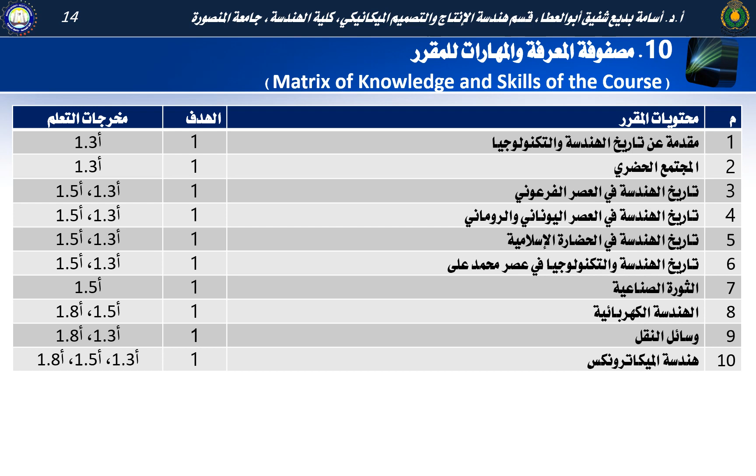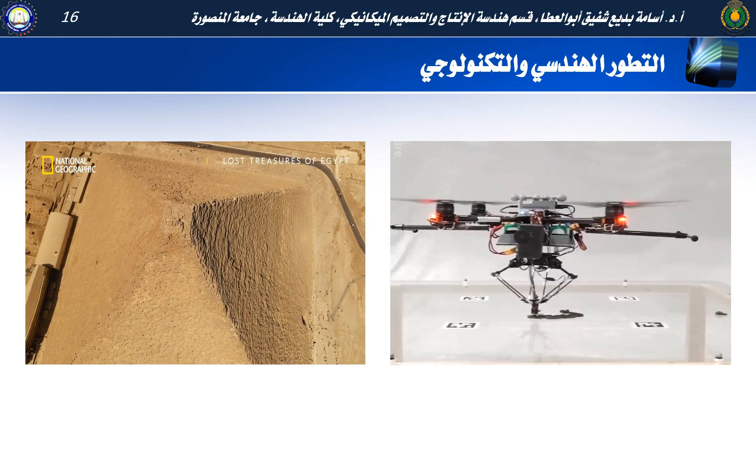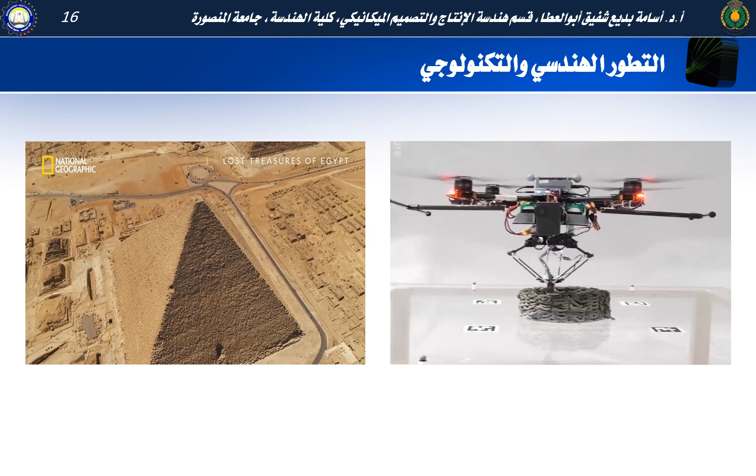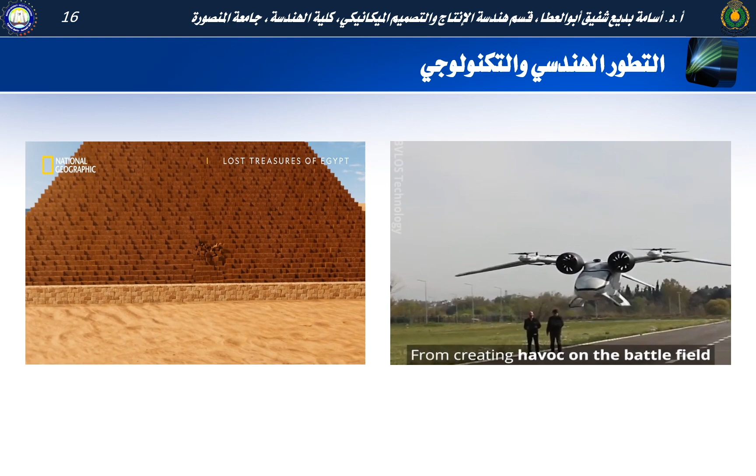The Great Pyramid of Khufu here at Giza is the culmination of hundreds of years of trial and error in pyramid building. But it's not only the perfect shape, it's the largest ever built, and it's never surpassed. The Great Pyramid was a fortress designed to protect the pharaoh's tomb. 24 foot off center, the entrance would have been tricky to find.

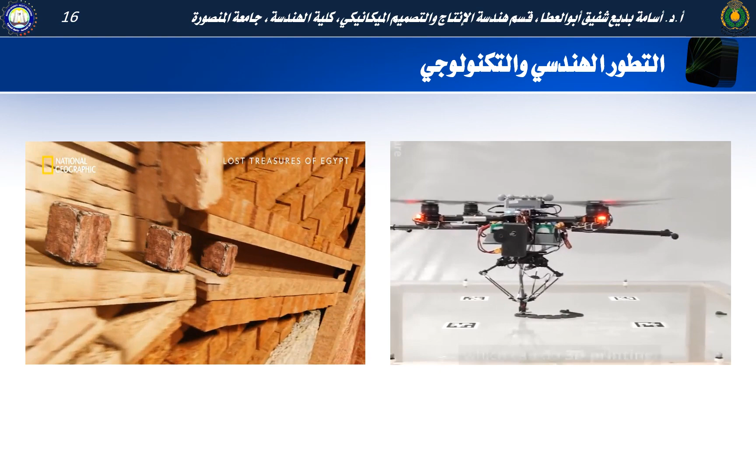At the top of a 130-foot passage, a pulley system of ropes dropped 3 enormous granite slabs, sealing off the entrance to the burial chamber. Next, 3 giant blocks slid down the shaft, closing off a grand staircase. This pyramid was a masterpiece of engineering. Capped with a layer of flawless white limestone, it was an unmistakable symbol of the pharaoh's supreme authority.

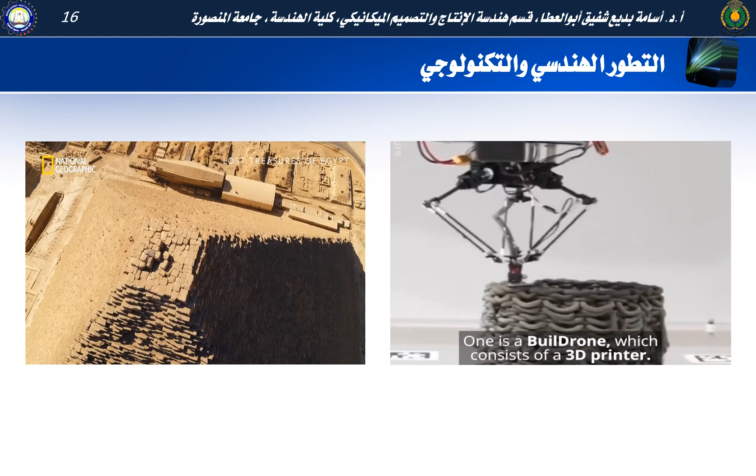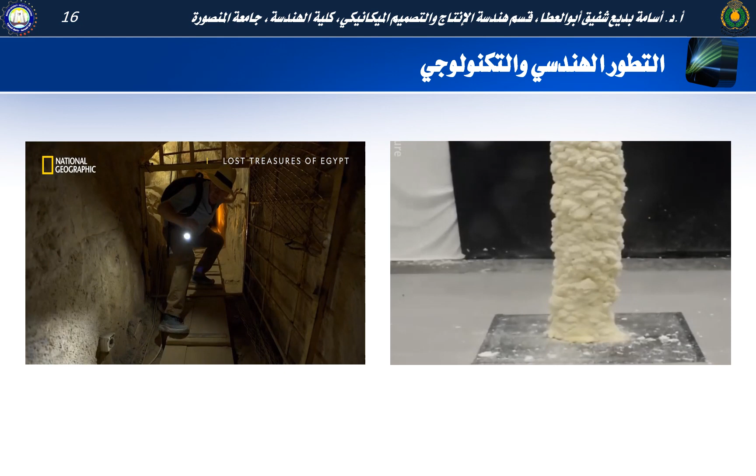The Great Pyramid was one of the first true pyramids ever built, and none of the Pyramid Age kings that followed Khufu would match it. The incredible scale of his tomb suggests Khufu wielded remarkable power, but very little is known about the king himself. Steve has been granted special access to explore the restricted areas inside the pyramid, to hunt for any clues to the life and death of this mysterious pharaoh.

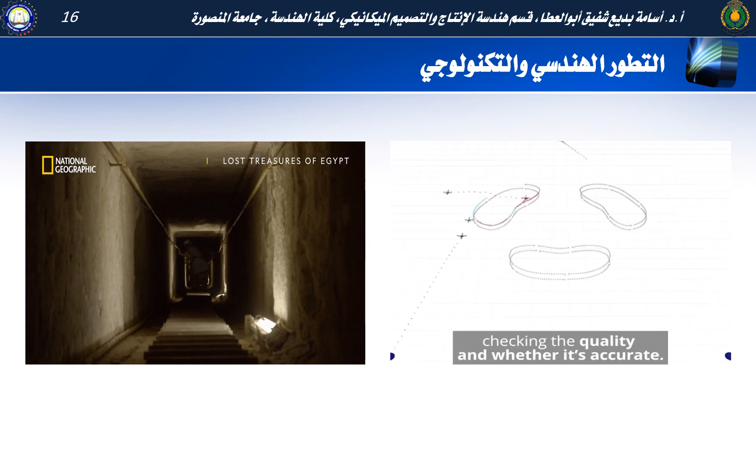I'm going to have to stop for a minute, guys. It really is getting dark. Hard to see anything.

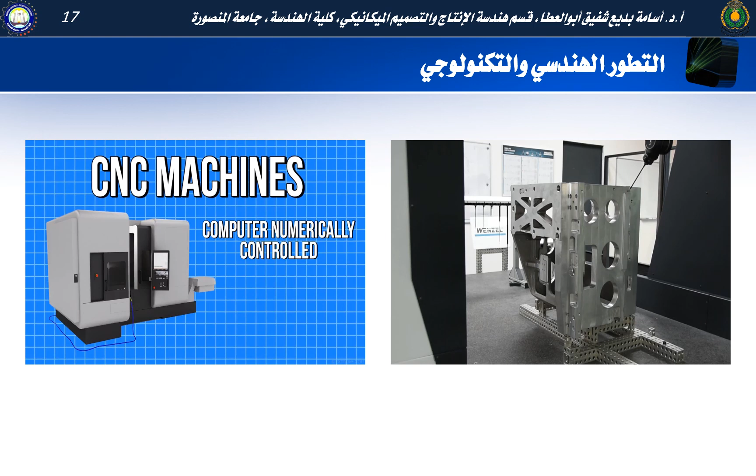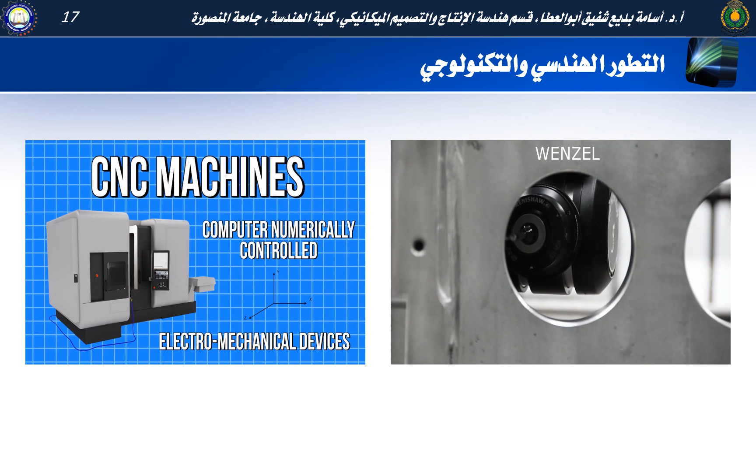With the other being 3D printing.

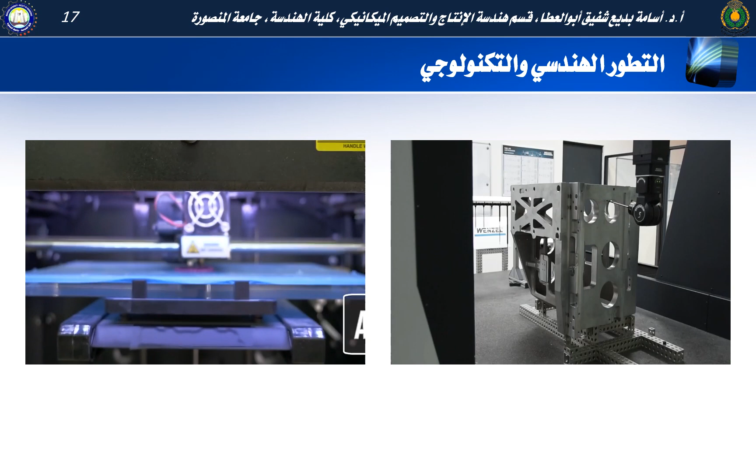On the other hand, is an additive process.

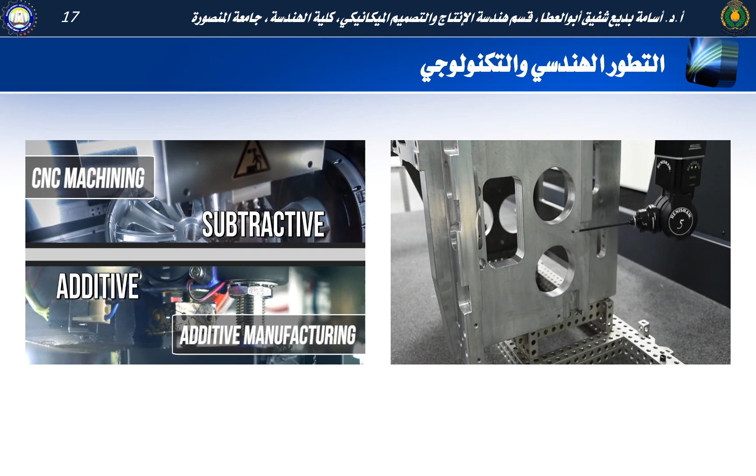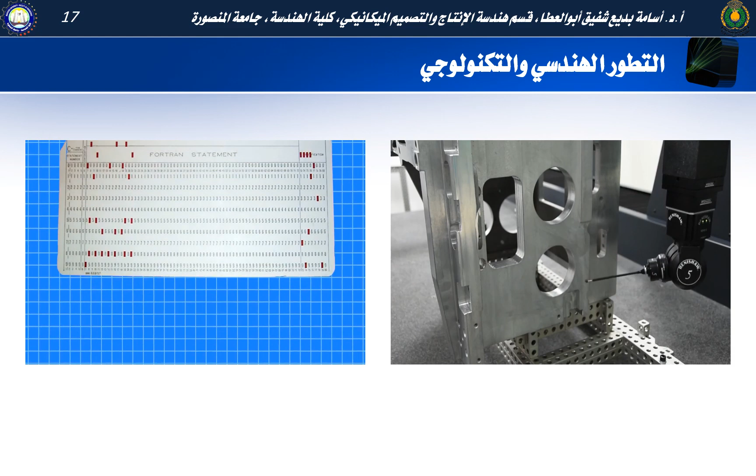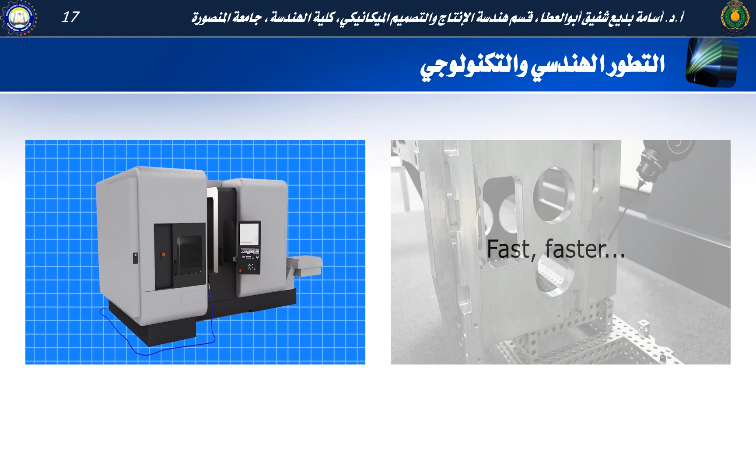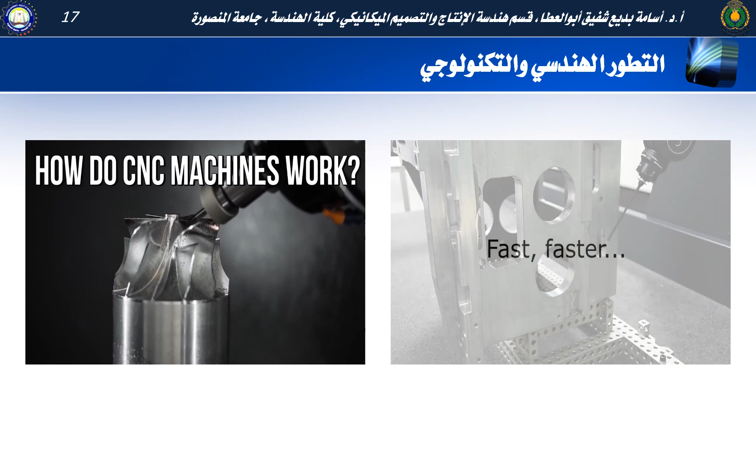Into a punch card and fed into a system that would then interpret the data. Needless to say, these early machines were rudimentary and their functionality was limited. CNC machining technologies rapidly grew as technological capability only accelerated in the late 20th century, which brings us to how modern CNC machines work. As mentioned before, machining is a way to transform a stock piece of material such as aluminum, steel, or titanium into a finished product or part.

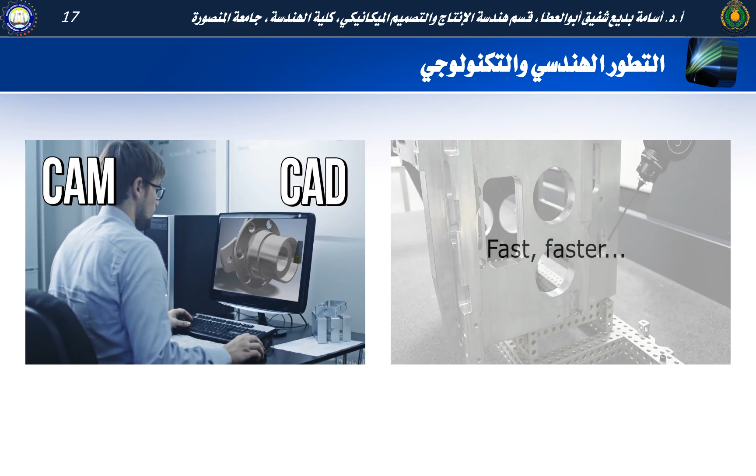CNC machines rely on digital instructions, specifically referred to as G-code. Before modern computer-aided manufacturing and computer-aided design programs such as Autodesk's Fusion 360 were around, machinists would manually write the G-code to control these machines. CAM programs today allow you to take a 3D model and automatically generate G-code that will drive the machine with little input.

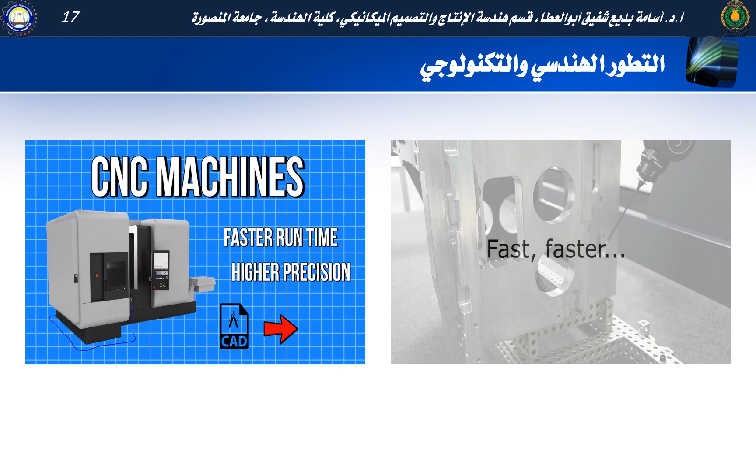When you compare the capabilities of automated CNC machining to the manual alternative like lathes and other machining techniques, you can start to see the benefits. CNC machines simply run faster at higher precision and accuracy while simultaneously allowing the transformation of a digital design into a physical part. CNC machines are precise and are measured in thousandths of an inch.

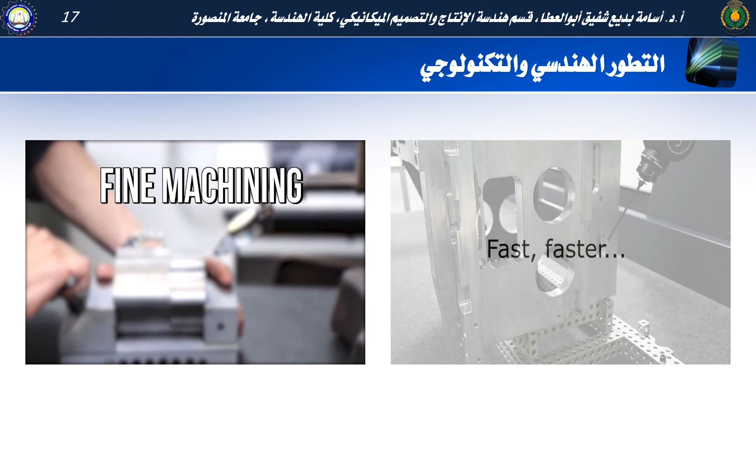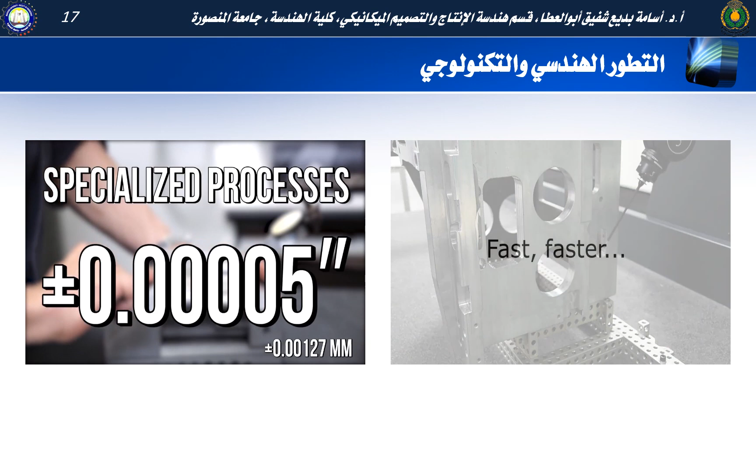...inch, referred to as thou. Standard machining can provide tolerances on parts around plus or minus 0.005 inches. Fine machining can produce tolerances of about plus or minus 0.001 inches, and specialized processes like polishing can offer up repeatable tolerances as tight as plus or minus 0.00005 inches. For reference, a human hair is 0.00069 inches thick.

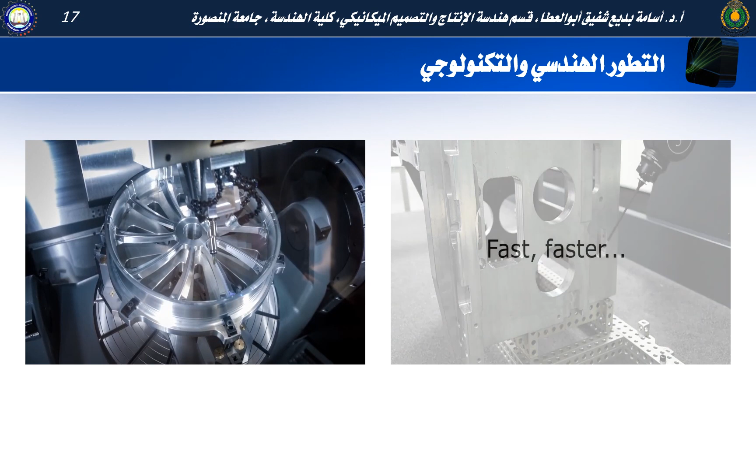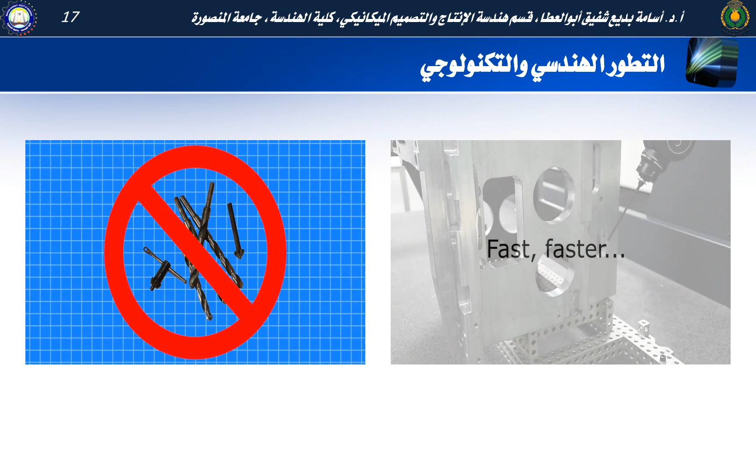Now that we have the basics of CNC machining out of the way, we can start to dig into the intricacies held within. Many designs or specific machining processes require the use of multiple tools to make cuts. One tool doesn't function universally. For this, machinists will often build digital tool libraries that interface with the physical CNC machine. These machines, often costing hundreds of thousands of dollars, can automatically switch tooling when directed by their digital instructions, allowing for them to become manufacturing workhorses.

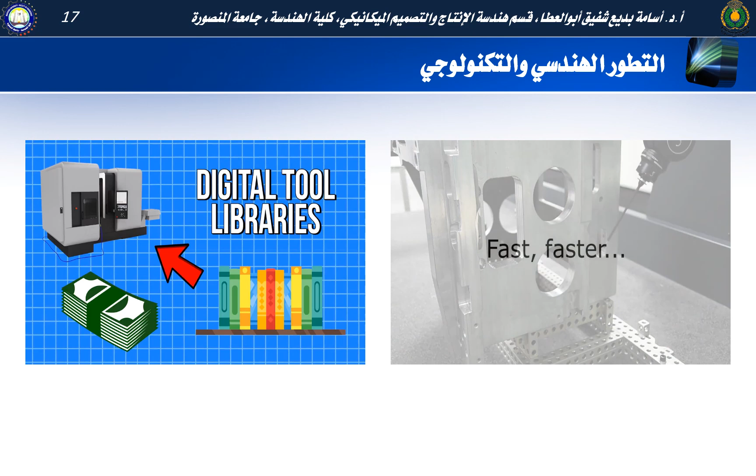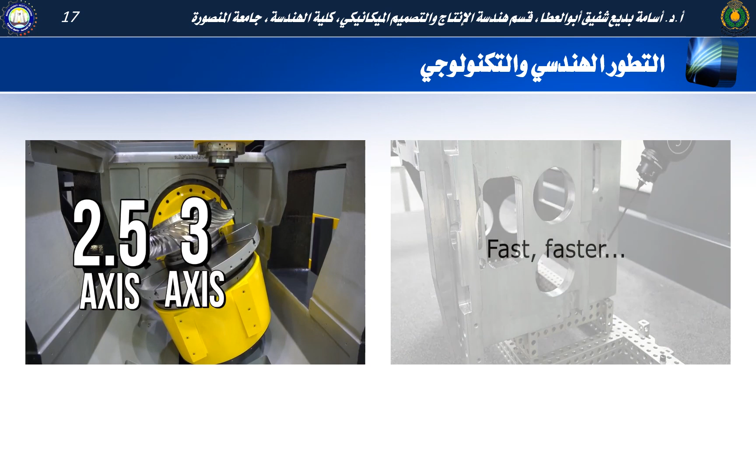Basic CNC machining will move one or two axes, referred to as the x-axis and the y-axis. You'll often hear the terms 2.5-axis, 3-axis, and 5-axis CNC machines, which simply refer to the degrees of freedom a machine can make cuts in. A 3-axis machine will move in the x, y, and z axis, whereas a 5-axis machine can move in these 3 axes along with 2 additional rotational axes.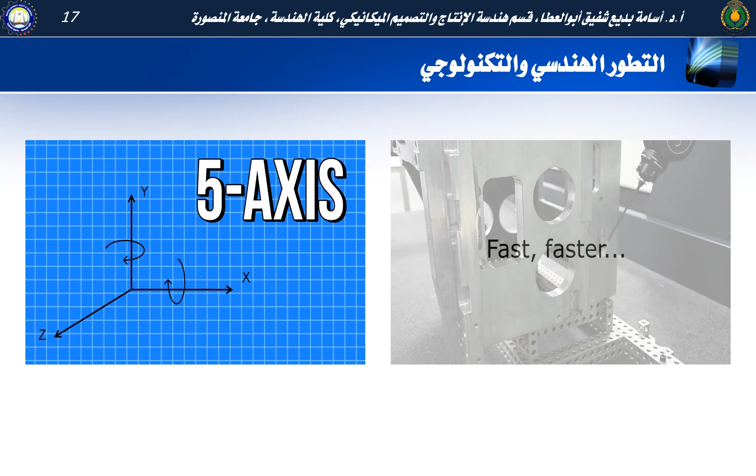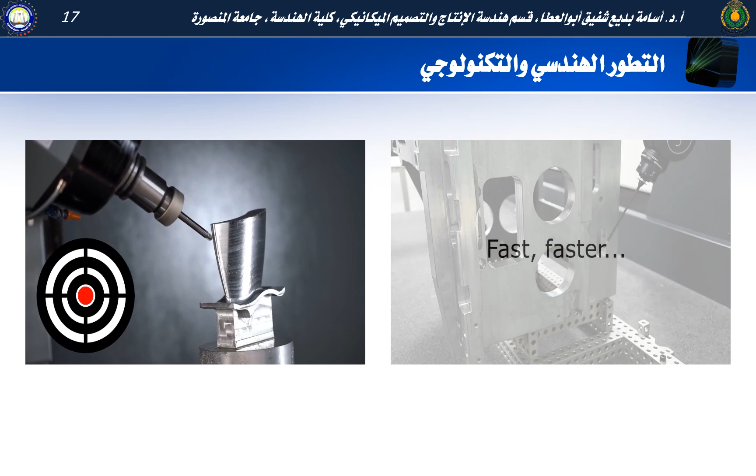As you might be able to imagine, the possibilities of production with 5-axis machines are practically endless. 5-axis machines used to be relegated to high-precision work, but as they have become more affordable, they are quickly becoming standard in many shops. There are 3 conventional machining technologies that you need to understand to grasp the basics of how material is removed from stock in CNC machines.

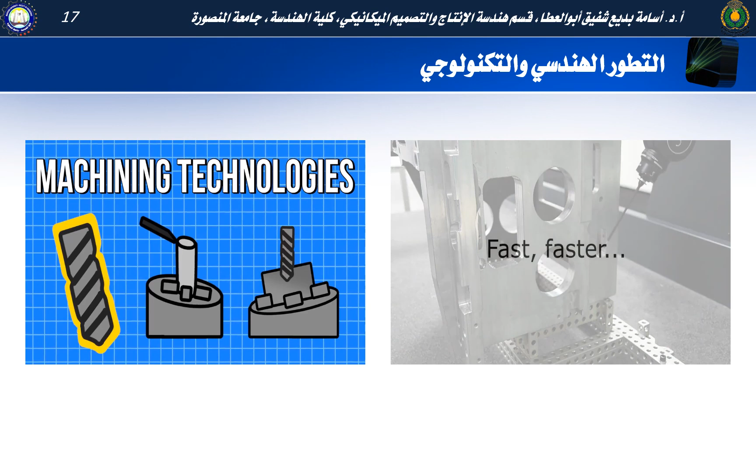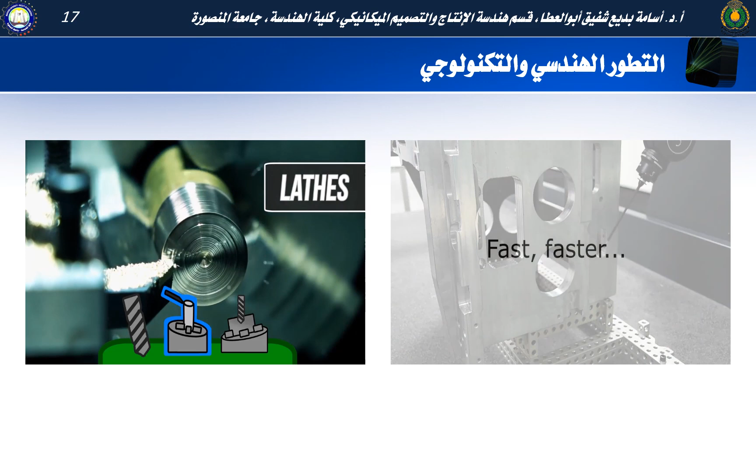The first being drills. Drills work by spinning a drill bit and moving a bit into contact with a stationary stock. Next, we have lathes, which function in reverse to drilling. Lathes spin the block of material against a stationary drill bit or cutter to remove material in a circular or fluid path. The shape capabilities on lathes are more limited than other techniques, but modern technology does allow these machines to create things such as square holes or non-circular shapes.

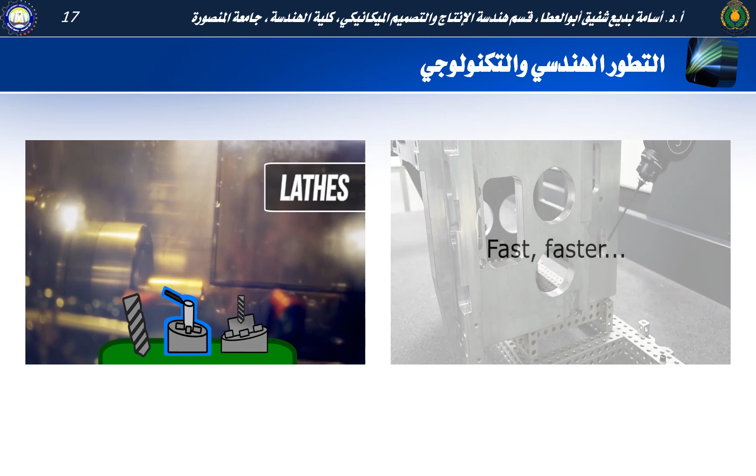Lastly, the most common CNC machine type is referred to as a milling machine. Milling machines involve the use of rotary cutting tools to remove material from a stock piece. These machines function similar to drills, with their tooling capabilities encompassing much more variety.

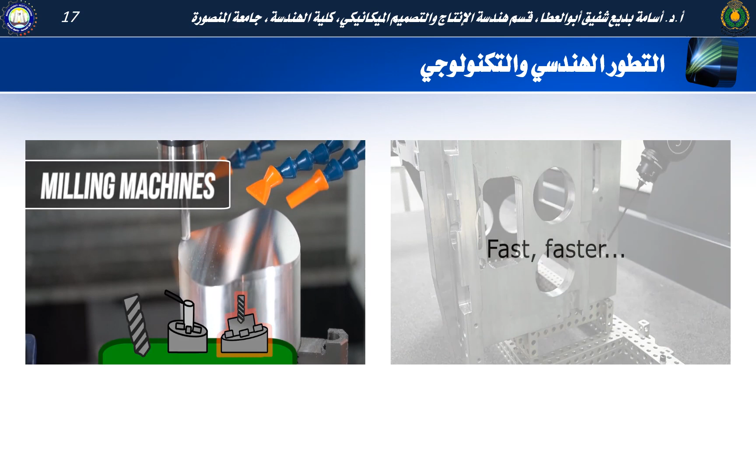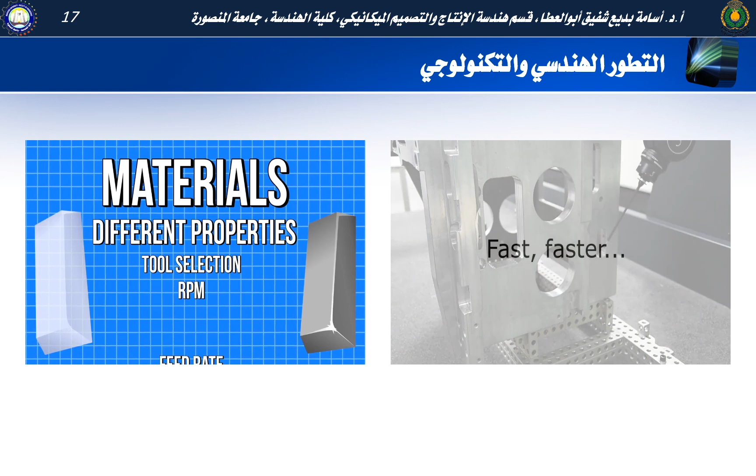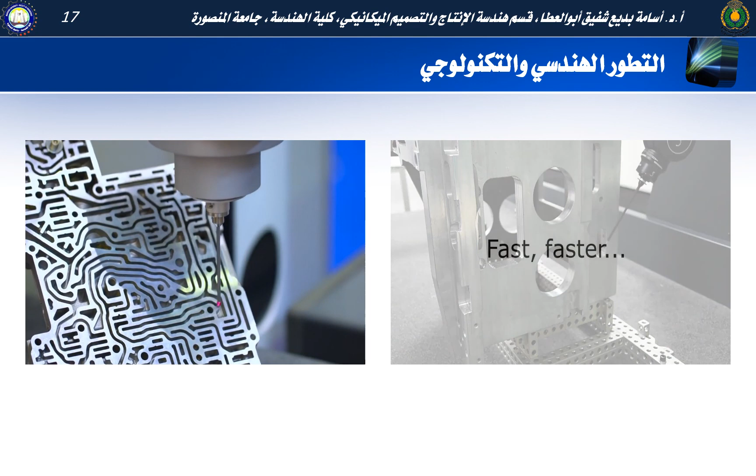Almost any material can be used in CNC machines, from plastic to titanium. Different materials have different properties, so machinists and engineers will overcome their unique challenges by altering machining variables like tool selection, RPM, feed rate, and coolant flow, among an extensive variety of other factors. CNC machined parts are all around you. They hold together your car and perform vital functions aboard SpaceX rockets. CNC machining is arguably the only way to produce high-precision metal parts for engineering designs across the world.

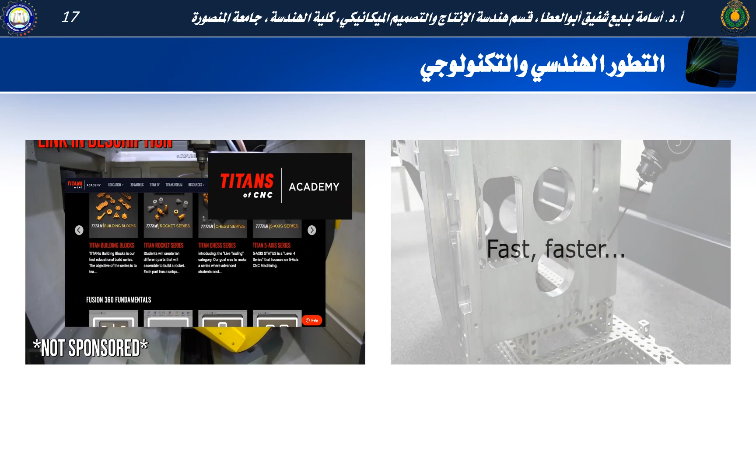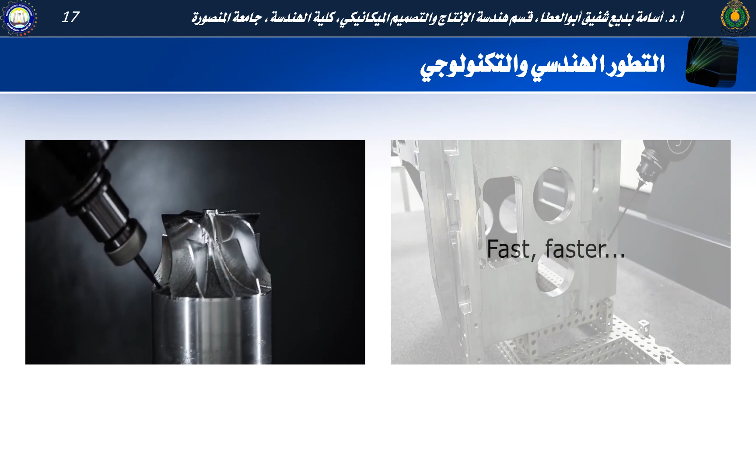So, CNC machining is arguably the most significant manufacturing process of the 21st century, and its functionality drives technological advancement across the globe. It's a trade that is keeping up with the growth of technology, and machinists across the planet are changing the world with their CNC machining skills.